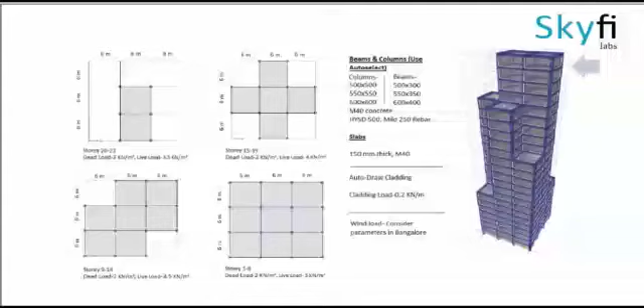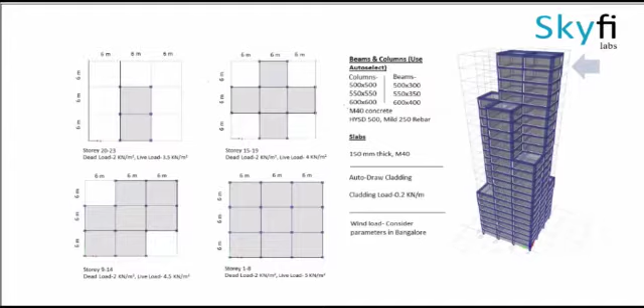Hi there, we are going to do tall building design using ETABS considering wind load parameter in Bangalore. By looking at this figure we can see the various beams and columns that have been given, and we have to use auto select option for both beams and columns of various sections considering M40 concrete and HYSD 500 and mild 250 rebar, and the slab is 150 thick, and the various sections and grid lines as shown in the figure have to be constructed.

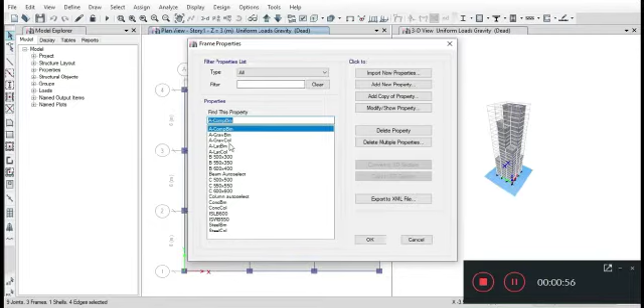Now go to define and add materials, and define the materials M40, mild steel 250 and HYSD 500 by adding new materials. Again go to define, section properties, and add beams and columns by adding a new property and selecting the given dimensions in the questions. I have already added, and we have to select an auto select list as shown in this property.

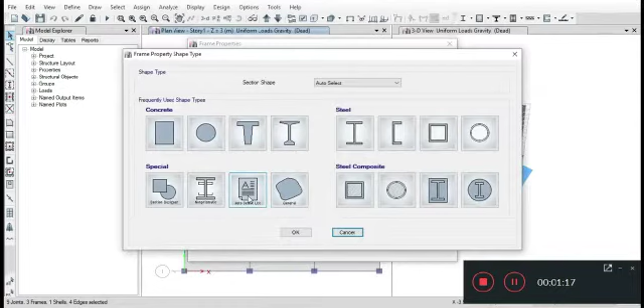The property of the list can be added by selecting add property and selecting the auto select list. Similarly, columns should also be considered. Now again go to section properties and add slab of 150. Using draw option, carefully draw beams and columns. Here I have already drawn.

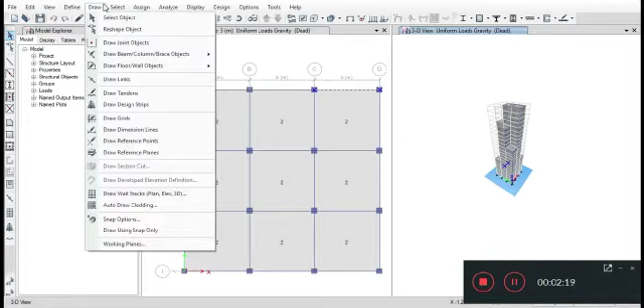After drawing carefully as per given questions, loads have to be assigned. On slabs, a uniform load of dead load and live load have to be given as per the given question. And for cladding, 0.2 kN per meter is given on the beams.

Now go to the ground floor as shown in the figure, Z is equal to 0 meters, and select all the joints, and go to assign and joints, keep it as fixed.

Now we will view all the loads acting on the structure. Now we are looking at cladding load. Now we will look at dead load and live load acting on the slabs.

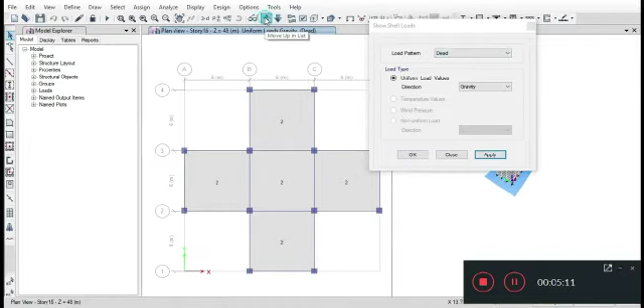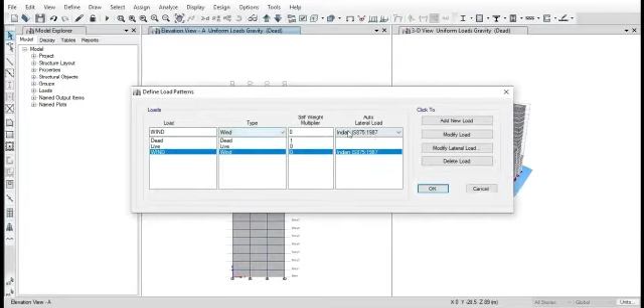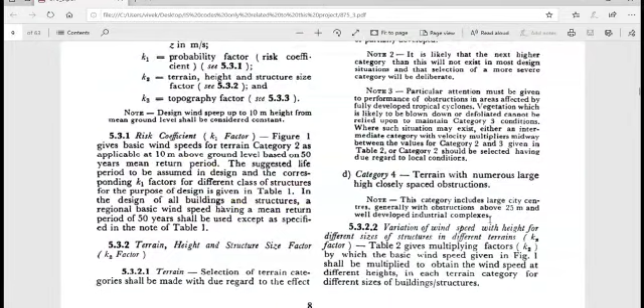To assign wind load, go to define load patterns, and in there we have to use IS code to determine the various parameters. The first one, we have to consider the velocity, the wind speed. In Bangalore, from the map we can see that it is 33. The next one is terrain category. From the code we can see that it belongs to category 3.

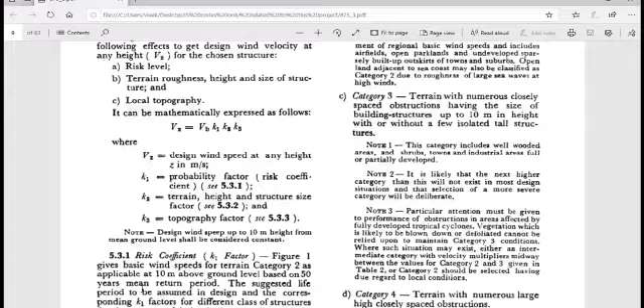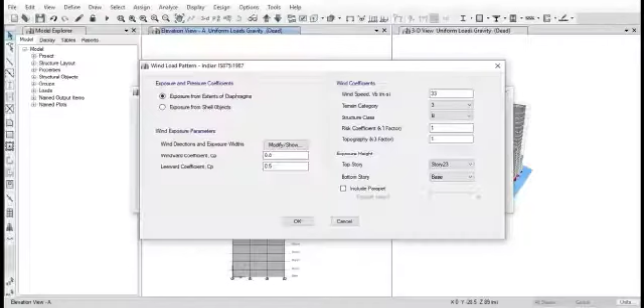Wind load has to be assigned by going into the elevation and assigning the shell loads as given by the IS code. This can be viewed in the video.

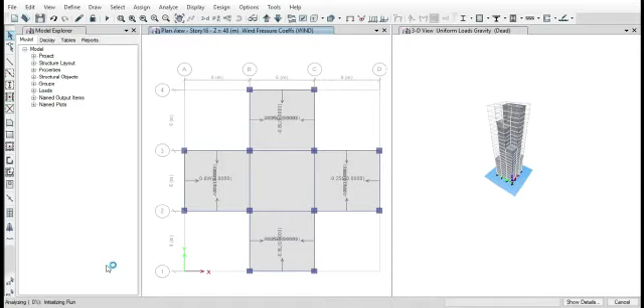Now we are in the final stage of the video, that is to analyze the model and design. For analyzing the model, click on Analyze and Run. It will take a long time as the number of floors is high, so I have fast forwarded the video. We can view the deformed shape of the structure and also we can view the bending moment and shear force of the structure.

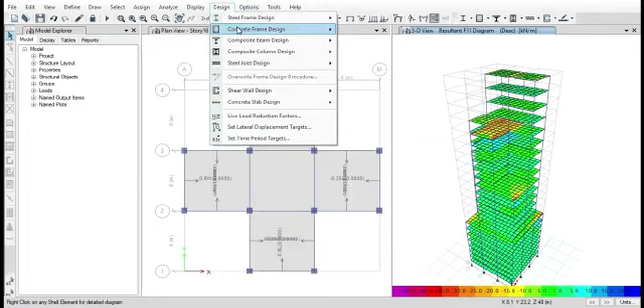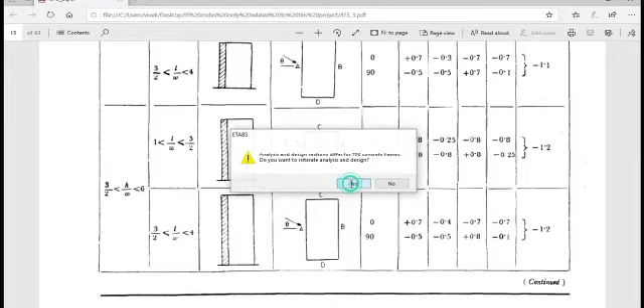For designing, go to the Design tab, Concrete Frame Design and click on Start Design Check. After checking the design, it will prompt; after clicking on yes, it will reiterate and redesign on its own. Again, it may prompt with the failed members and again try to reiterate the structure.

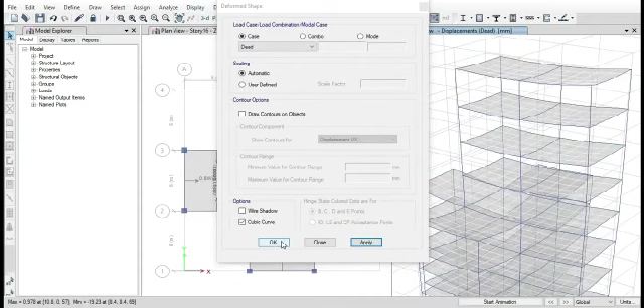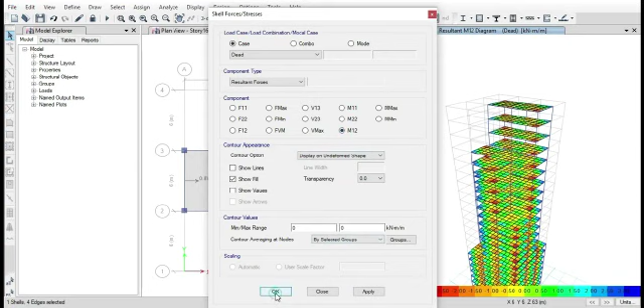Now the design is complete. To check whether all the members have passed, go to Design, Concrete Frame Design and click on Verify All Members. Now it has prompted that all the members have passed. Now the design is completed.